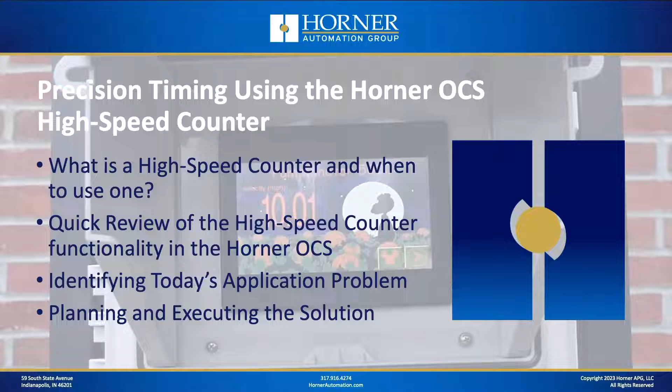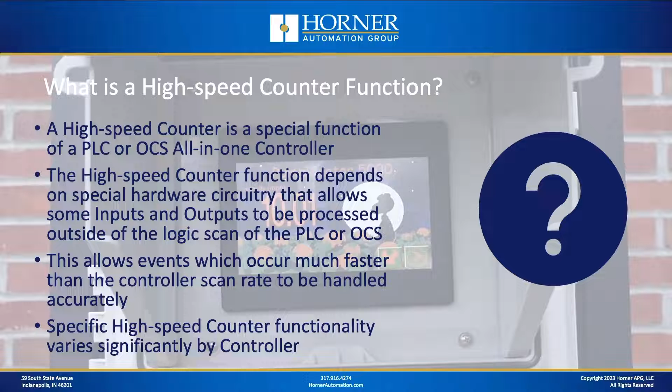So what is a high-speed counter function? Effectively, a high-speed counter is a special function of a PLC or an OCS all-in-one controller, and that function depends on special hardware circuitry built into the PLC or OCS that allows some of the inputs and outputs to be processed outside of the logic scan. This allows events which might occur much faster than the controller scan rate to be handled accurately. The specific high-speed counter functionality available is going to vary by controller, so you always need to pay attention to the capabilities of the particular controller you're using as you plan out your application.

So when would you use a high-speed counter function? There's a whole bunch of situations, and here's some examples. The most obvious one is when you're counting pulses that are on for a very short duration. Maybe you've got a pulse train of about 5K, 2K, 10K, maybe even just 1K, and obviously they're not on for very long. If you just wired that device to a regular PLC input, you're going to miss a lot of transitions. Similarly, if you're measuring a fairly high frequency accurately, you're going to need a high-speed counter. For today's program, we're timing an event where each millisecond is important, so we can't just use built-in PLC inputs and timers and counters in the logic program.

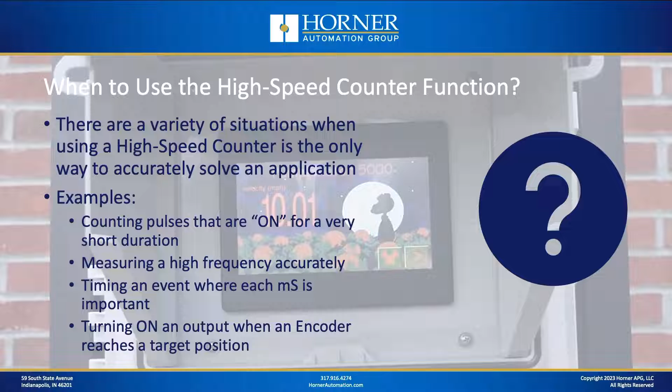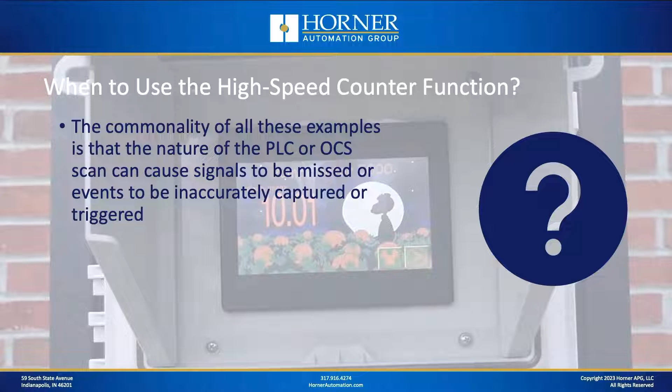Another good example is when you want to fire a digital output, a solid-state output, when an encoder reaches a specific target position. You'll probably need a high-speed counter function there. What all of these examples have in common is that if you just wire these signals strictly to your standard PLC inputs, you're going to miss signals and you're going to inaccurately time, capture or trigger events. That's the commonality between all those examples.

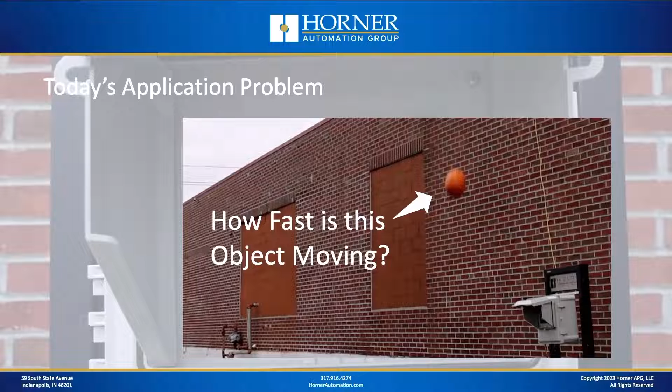Okay, so last week, our application problem was: how fast is this object moving? That object I've got highlighted there is a pumpkin that we dropped from the roof. So just before we get into the more serious stuff, I'll show you a couple replays of some of the drops that we did last week.

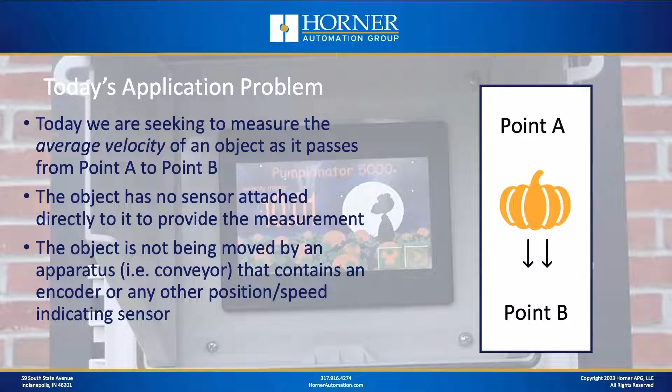Okay, so let's head back to our application problem. So effectively what we did last week is we needed to measure the average velocity of the pumpkin as it passed between point A and point B. And point A was the top of the roof and point B was the ground. Now, even though in some of our silliness we kind of pretended to put an accelerometer on the pumpkin at one point, for a bulk of the testing we did, there was no sensor attached directly to the pumpkin. We strictly depended on a photo eye at the top of the roof and another one on the ground. And the idea being that we would time very accurately how long it took for that pumpkin to get from point A to point B.

Now, let's say we were going to solve this application without using the high-speed counter function. How would we do that? Well, effectively, what we would do in that scenario is we would connect the two photo eyes, the one at the roof and the one at the ground, to standard PLC inputs. And then as soon as that first photo eye input turned on, we would start a 1 millisecond retentive timer, for instance. And then as soon as the second photo eye turned on, we would stop that timer. And as long as we had a retentive timer, that accumulator value would tell us down to the millisecond or so how long that took. So that seems like a reasonable approach to solving that problem.

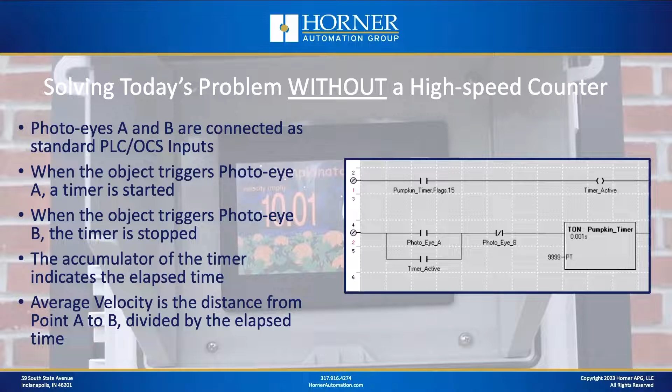And it would truly work if your distances between A and B are large and your object is moving very slowly. In that scenario, the scan rate of 5 or 10 milliseconds or whatever it happens to be for your application would be insignificant as compared to the measured times. However, as we were dropping these pumpkins from the roof, the distance between A and B wasn't very large. It was only about 4 meters, and the pumpkins were traveling pretty quickly. So strictly using the PLC method was not going to give us a whole lot of accuracy. Certainly not accurate enough for the Pumpkinator 5000, and so that's why we decided to use the high-speed counter function.

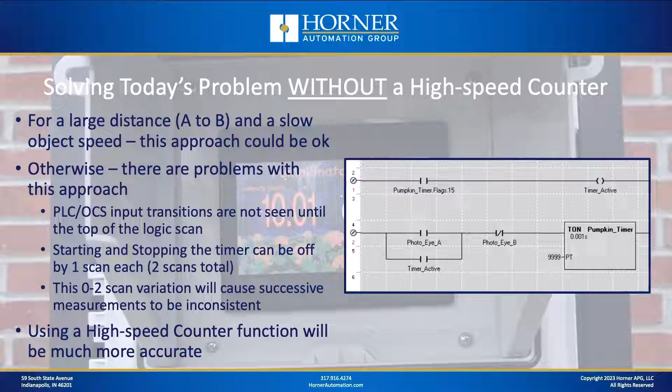Now, before we dive into the specifics of how we set up the high-speed counter and how you might do something similar in a future application, let's review a little bit the high-speed counter capabilities between the different OCS product lines. And this is true even if you're using a PLC. You always need to understand specifically what the high-speed counter capabilities are with your hardware. If you're using some of our lower end products, still very capable, like the XLEE and XLTE and the Micro OCS series, you'll find you have 4 high-speed counters available, and you can do all kinds of functions. You can do totalizing, which is counting. You can do frequency measurement, pulse measurement, and you even can connect an encoder and use quadrature mode. Okay, so that's a pretty good capability.

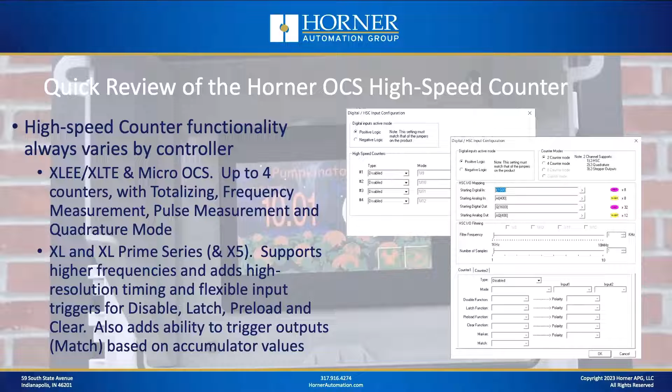But if you're using our higher end products, like the XL series from the XL4 on up, including the X5 or the Prime series and the future Canvas series, you'll see there's a bunch of additional capability. So in addition to supporting higher frequencies, we also add high resolution timing and flexible real-world input triggers for disable, latch, preload, and clear. You'll also be able to fire real-world outputs based on high-speed counter accumulator values. That's another key capability. So as you can see, the XL series, XL Prime series, those higher end products have a little bit more capability. And specifically in our application, because today's problem is one of precision timing, we're going to take advantage of the high-speed timing capability of the XL series and above high-speed counter. So we decided for the Pumpkinator 5000 that we would use the EXLW.

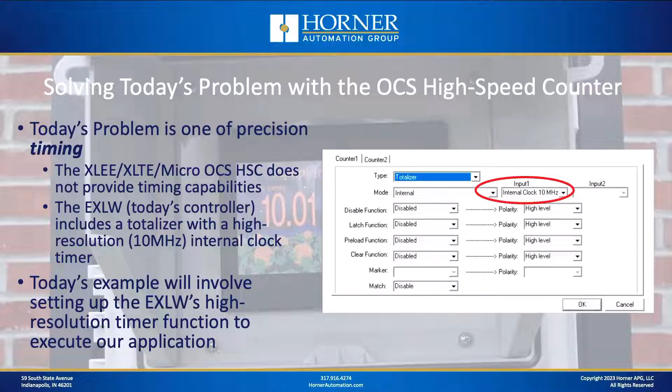It was a controller we had sitting around, and it has the enhanced high-speed counting capabilities. Okay, so how are we going to set this up in the OCS? Now, I'll go through all the detailed configuration in a bit, but let's go ahead and show you through a couple of slides first.

As I just mentioned, we're going to take advantage of a special mode of the totalizer of the high-speed counter where we can effectively count 10 megahertz pulses that are generated by an internal clock. That gives us the ability to turn our high-speed counter into a high-speed timer and use those capabilities. Now, what we're also going to do is take our photo eyes, A and B, and wire them in not just to any regular old input, we're going to wire them into one of the 4 high-speed inputs.

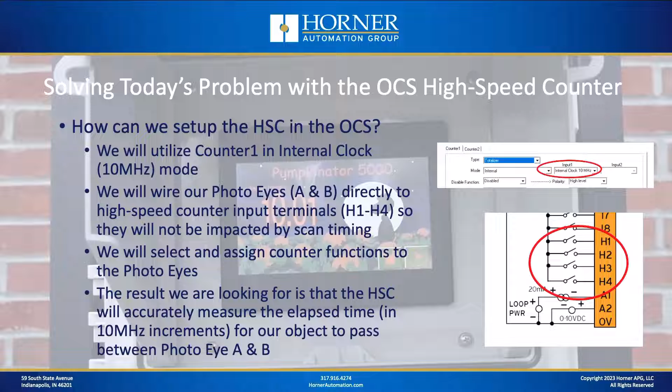In the XL series and XL Prime series and the future Canvas series, those are labeled as H1 through H4 on the terminal strip. And then from a memory map standpoint, those are I9 through I12. So those are the high-speed inputs that are physically connected internally in the OCS hardware to the high-speed counter circuitry. So the result we're looking for is that our high-speed counter is going to be sitting there counting up in 10 megahertz increments, and we're going to somehow use those 2 photo eyes to capture and measure the elapsed time.

Okay, so now there are 4 high-speed functions that are kind of in our toolbox for any high-speed counter application. And these are disable, latch, preload, and clear. And for every high-speed counter application, you can decide, do you want these functions to be performed by an external real-world input connected to one of the high-speed inputs? Do you want it to be an internal function triggered by a variable that's mapped to a Horner internal memory point? Or do you just want to disable that feature for that application because it's not really needed?

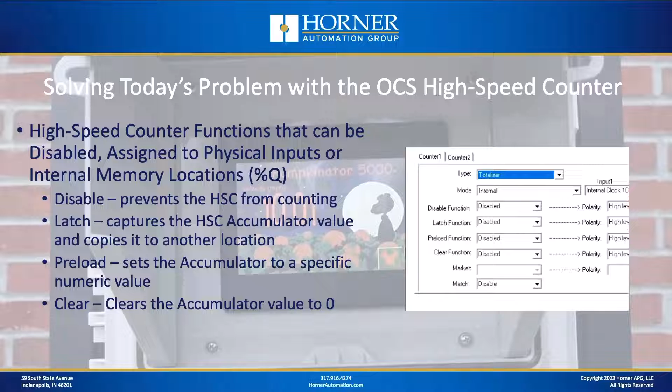Now, the 4 different functions do as follows. You have the disable function, which will disable the high-speed counter from counting. You have the latch function, which will instantaneously take the current value of the accumulator and copy it away to a different location where it can be accessed later. You've got the preload, which you can use to effectively set the accumulator to a specific value, and it's typically a non-zero value. So maybe your machine is at position 10,000 and you want to load the 10,000 into your accumulator and then take off from there, for instance. And then the clear function is pretty self-explanatory. When that's active, the accumulator is set to a value of 0.

Okay, so let's set about solving this problem by first thinking about it like we were doing it using just the standard timers that were built into the PLC, and we were wiring everything to a standard PLC input. So could we make the high-speed counter work such that the counter would start timing, counting 10 megahertz pulses when the first photo eye is triggered, and stop timing or counting when the second photo eye is triggered? Well, to do that, I think we would have to utilize the disable function very creatively. We would have to connect the disable function to a real-world input, and somehow make the disable function turn off whenever the leading edge of that first photo eye is triggered.

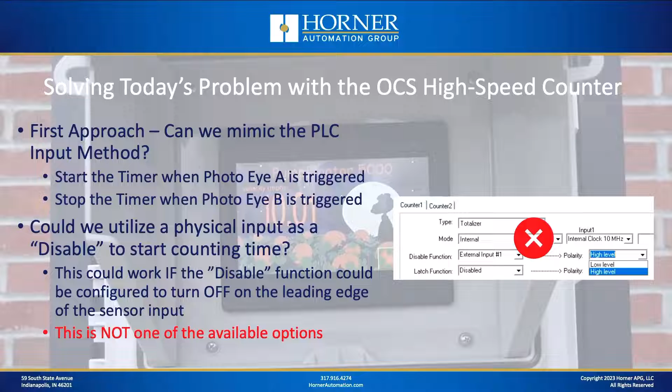And if we go into the configuration under the disable function, yes, we can connect it to an external input, but the only choices we have are either to turn on the disable function when the physical input is high, or turn off the disable function when the physical input is off. So that's really not the flexibility we would need to configure it this way. So we're going to abandon this first thought of making the high-speed counter work exactly like it was just a regular PLC type timer.

Okay, instead, what we're going to do is as follows. We're going to utilize disable, but we're going to use it as an internal function. So we're not going to use an external real-world input to enable and disable, or to turn on the disable function for our high-speed counter. We're going to do that internally in our program. And the reason we're going to do that is because enabling and disabling isn't necessarily critical from a timing standpoint.

Because what we're going to do in this scenario is when we turn off the disable on our counter, allowing it to start counting, we're going to make that non-critical from a timing standpoint. And instead of using that to kick off the start of the elapsed time calculation, if you will, while the counter is busy counting, we're going to use the clear function connected to the first photo eye.

So the high-speed counter will be not disabled. It'll be sitting there counting up in 10 megahertz increments. And then when that clear input turns on from the first photo eye, it's instantaneously going to go to 0, but then continue right on. And then therefore it'll be counting up from 0 until it hits that second photo eye, which we're going to assign to the latch function, and then we'll get the result we want.

The elapsed time in 10 megahertz increments will be contained in the latch register. So that's where we'll actually see the result of our experiment, if you will, or the result of our calculation. Now, this can only work if both the clear and the latch functions can be active on the leading edge of those switches, because that's what we want to happen.

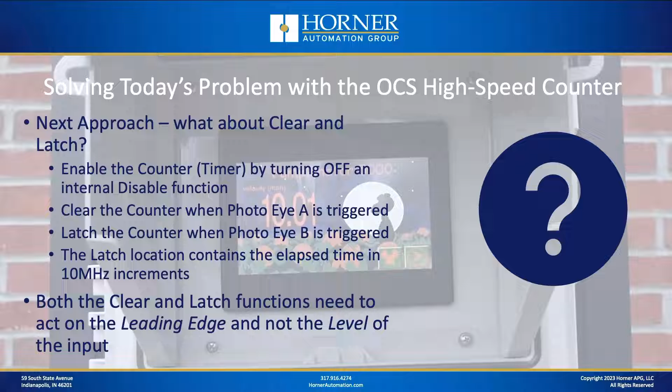And as we go into the high-speed counter configuration block, and I show you a screenshot of that, you can see we can configure it exactly as I have just described. So we can assign disable to an internal bit, which we can then map to a variable. We can assign the clear to our first external high-speed input. We can assign the latch to our second high-speed input, and then we can assign both those high-speed inputs to be active on the rising edge of that signal. So that's what we're looking to do there.

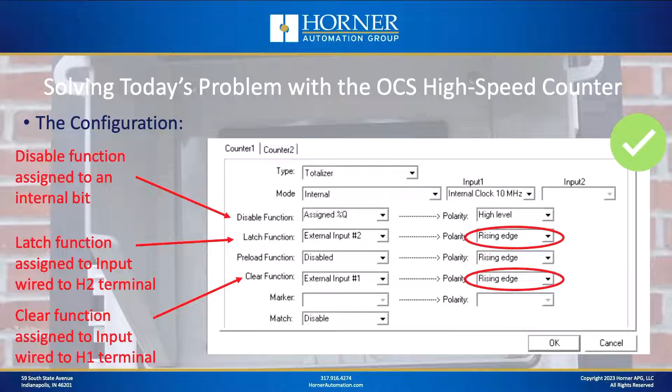Okay, now when we get to actually getting into our program after we've done the configuration and we need to start creating variables and using those in our program, the first thing we're going to have to do is go to the user's manual of the specific controller that we're using and find the high-speed counter memory map. And I've just got a snippet of it here for the EXLW counter number 1, showing the memory map for the accumulator, for the latch value, and then for the latch, preload, clear, and disable functions that are mapped to %Qs, whereas the accumulator and latch values are mapped to %AI registers.

Now, in our application, there's some key variables we're going to need to utilize. So we definitely care about the latch value because that is where our resultant elapsed time is going to be in 10 megahertz increments. So we're going to need to create a variable that we map to AI403. That'll be our latch value as a double integer. And then because in my case, I've chosen to disable and enable the counter to start and stop it from logic, I'm also going to need to create a high-speed counter disable variable and map that one to Q1604.

Now, I'm not going to assign variables for the latch, preload, and clear for the Q bits, because certainly the latch and the clear are going to be handled from the real world side of things. Now, one last note here, and that is this. I still want to be able to see the status of the top and the bottom photo eyes, even though they're directly wired into the high-speed counter circuitry. I still want to be able to tell if those are on or off, because I might need that elsewhere in my program.

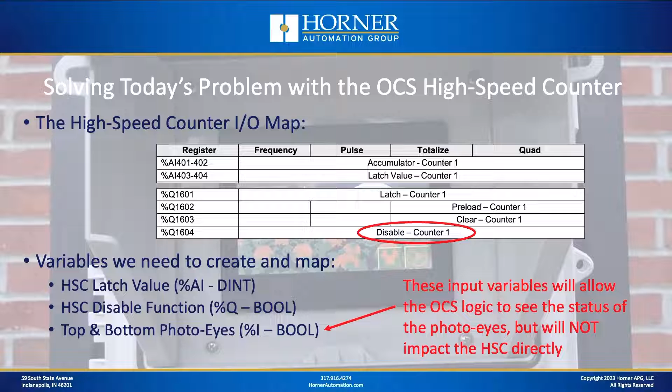Okay, and then once I have the elapsed time in 10 megahertz increments, then it's just more or less simple math, because remember, the distance between the two photo eyes is a constant, a certain number of inches. And then if I want to take my 10 megahertz increments from my latch value and convert that to milliseconds, which is a convenient unit for applications in the automation industry, I just need to divide that value by 10,000. That'll give me milliseconds. If I want velocity in inches per second, I take the fixed distance between A and B in inches, divide it by the number of milliseconds, and then multiply by 1,000 to get my milliseconds over to seconds.

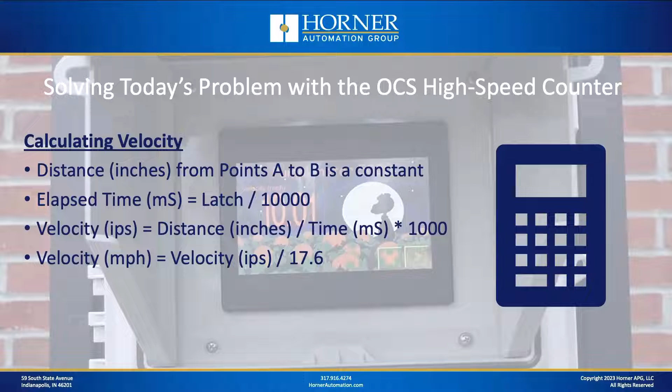And then to convert to miles per hour, I just divide inches per second by 17.6. And yes, I just Googled that. I could have figured it out, but I just decided to Google it instead.

Okay, so let's go ahead and take a look at how we've set things up in Cscape and how things look here on the bench for our Pumpkinator 5000. All right, so let's take a look at the bench first. Okay, and here we go. We've got our EXLW with our Pumpkinator 5000 program, and I'm just using my handy dandy IO simulator wired up to the first two switches.

So I have switch number 1 connected into the first high-speed input. Remember, that's acting as the clear. And I have toggle switch number 2 connected to the latch, high-speed input number 2 on my Pumpkinator, so that I can, again, perform the latch function as my pumpkin falls from point A to point B. So that's what things look like on the bench.

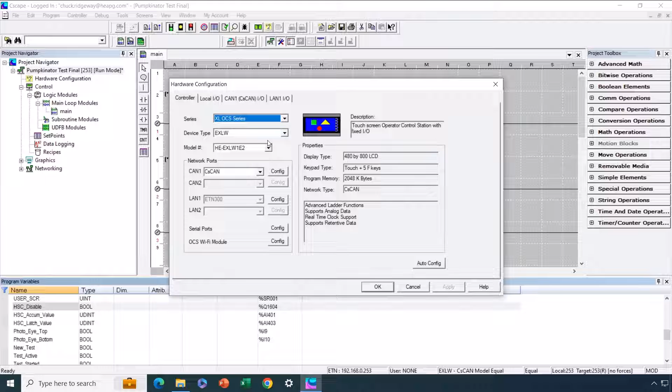All right, let's go back to Cscape now, and let's take a look at our program. Now, with the high-speed counter, you always start with your I/O configuration. So let's take a look at that I/O configuration. So here's my EXLW. I need to go to the local I/O tab. I select the config button on the I/O area here. I go to module setup, and I go to the digital in/high-speed counter button. And this is all the setup that's available for my high-speed counter.

Now with the XL series, you've got 2 counter mode and 4 counter mode available. And I believe with XL Prime, the default is just 4 counter mode. I'm not 100% sure on that, but I'm pretty sure that's the case. We can configure whether our inputs are positive logic or negative logic, and that impacts all the inputs, not just the high-speed inputs. We have a default memory map for all the different high-speed counter functions. Now, in almost every case, you're going to leave these exactly as they are. That way, all the tables in the user's manual will match these references exactly. So it keeps things nice and simple.

Now, you also have some filtering capabilities that I'm not taking advantage of here. If I was installing this in a real machine, I probably would do a little bit of filtering to prevent signal bouncing on my photo eyes. That would be something I would probably do, but I didn't do that in this case. And then down here at the bottom, that's the screenshot I showed you earlier. That's the configuration I'm specifically using for this application.

So I am using a totalizer or counting mode instead of one of the other modes that you can see here. And then I'm using a special mode, which is counting internal 10 megahertz clock pulses. Now, there's also a 1 megahertz mode, and that would have been ample for this application, but I selected the 10 megahertz instead. And then down here is where we decide where we want our disable, latch, preload, and clear functions to come from.

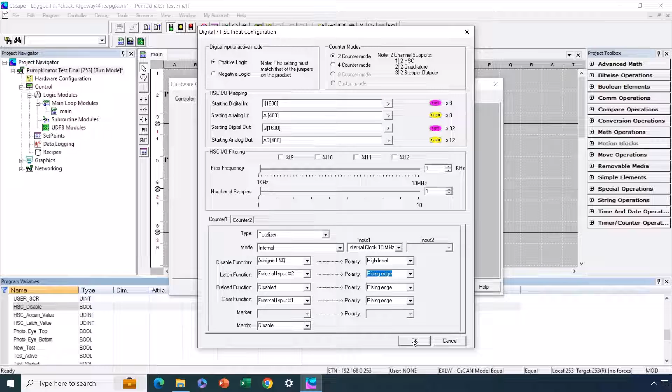Now let's take a look at how we've created our variables here. So let's go down to our program variable table. And the first thing you're going to see is the high-speed counter disable function, which we chose to do as an internal variable as opposed to an external real-world physical input. So we've created a Boolean variable and we've mapped that to Q1604. Why Q1604? Well, that's the default memory address for the internal disable when you look at the EXLW high-speed counter chapter of the user's manual. So again, you're going to need to reference that user's manual.

I went ahead and created a variable of unsigned double integer type for the accumulator. And again, from that table in the back of the manual, that's at AI 401. And then I also created the key latch variable. That's where our elapsed time value is going to reside. And that's in AI 403.

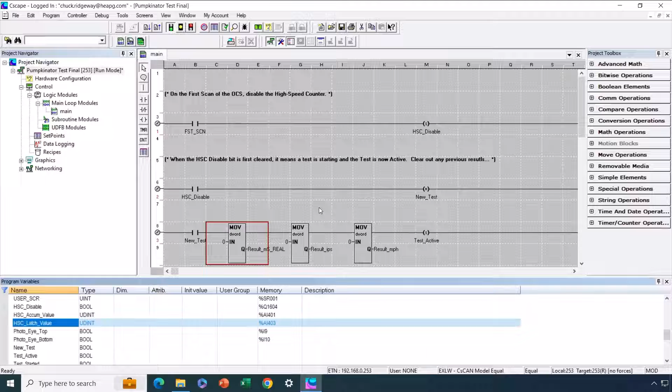Now, for my photo eyes top and bottom, remember, those signals are physically wired into high-speed counter inputs H1 and H2, but I'm still interested in knowing when they turn on and off. So I'm going to assign %I9 and %I10 here so that I can follow along and see when those switches turn on and off, because I might want to use those elsewhere in my program. Okay, so that's what my variables look like. All right, now let's go back to the bench. Let's look at the Pumpkinator 5000 in action, see how that all works at runtime, and then we'll come back and take a look at the logic.

Okay, so let me switch over to my bench view. All right, here we go. So this is my main screen. So this first button represents the first photo eye, and this is the second photo eye, number 2. So I'm going to first need to enable the test, which effectively turns off the disable to the high-speed counter, and I'm going to do that from the screen.

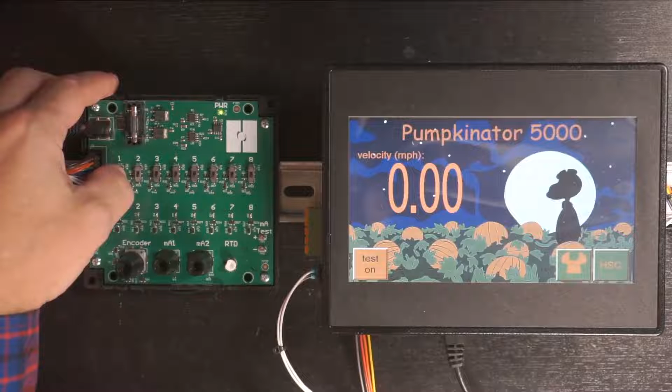Okay, so now my test has started. Now my pumpkin hasn't reached point A yet. Okay, that will be found whenever I flip this first switch. Okay, and then it'll reach point B when I flip this second switch. And then because it took quite a while for that to happen, you can see my pumpkin was only going at 2.75 miles per hour. Now, if this pumpkin was dropping from the sky, that wouldn't be very realistic, but maybe if it was going sideways or something, that might make sense.

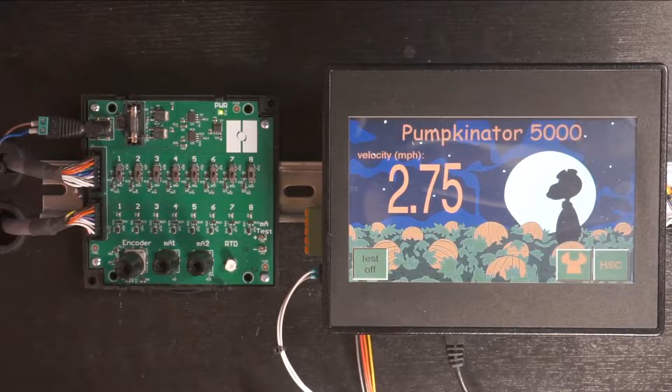Okay, so that is kind of what it looks like from the main screen of the Pumpkinator, but let's go under the hood a little bit and see how this thing works with a little more detail. Okay, so this is the screen where I enter in what is the distance between points A and B, which in my case is the drop height that we're talking about here, okay?

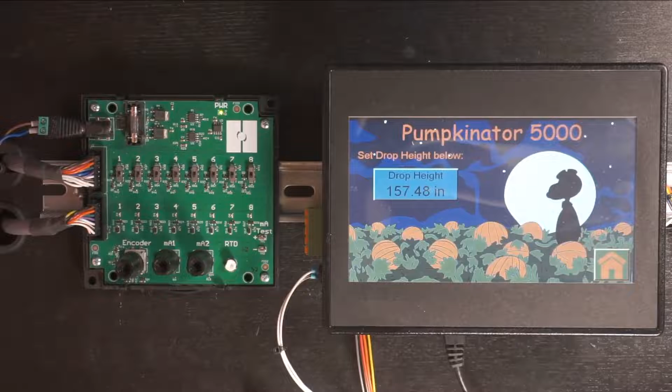And then on this screen, this is where we get to follow along and take a look at the values in the accumulator and the latch value, as well as the results of our calculations. And what you're seeing here on the screen is the results from the previous trial. So let's go ahead and run a trial from this screen. I'm going to go ahead and start by enabling the high-speed counter.

You can see that the accumulator value just took off from wherever it was. It didn't clear first, it just took off from wherever it was. And then the results at the bottom are zeroed out, but that was caused by logic. Okay, so we're waiting for that first photo eye to turn on. And then once that happens, we'll be waiting for the second photo eye. So let's go ahead and, I guess, release our pumpkin. Okay, so here's point A and here's point B.

Okay, so as you can see, our accumulator kept going until the high-speed counter was disabled automatically by ladder. But the latch value there is the actual value in 10 megahertz increments when that second photo eye was first tripped. Now, one thing you'll notice is that the accumulator value is different than the latch value. That's because it kept on going.

So one way you can look at this is you can see that our trial took a little over 1,000 milliseconds. At the bottom there in the lower left-hand corner, you can see 1,060 milliseconds. But if we depended on freezing our accumulator through a real-world logic input, you could see we would not have accurately gotten that information. It would have been off by quite a few counts there, as you can see.

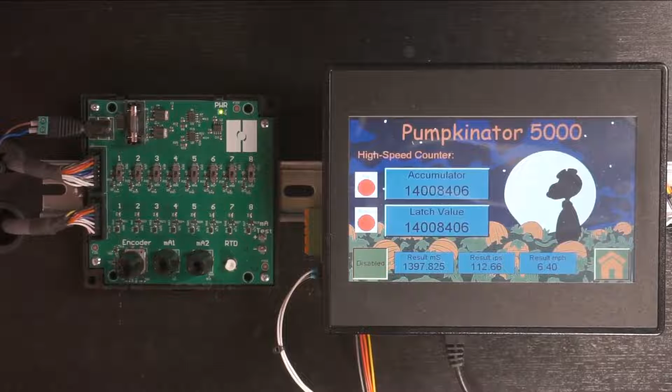Okay, let's head back to Cscape and take a look at how I implemented the logic for the high-speed counter. Okay, so whereas for the high-speed counter configuration there's probably a little less room for variation from what I did, depending on the way you want your application to work specifically, there's probably quite a bit of room for you to program the application a little differently than I did. So the way I've programmed the application is this.

On the first scan of the controller, I went ahead and turned on the high-speed counter disable function. Remember, we're doing that from logic. So the high-speed counter on the first scan is just sitting there frozen at its previous value. It's not ready for a trial or anything.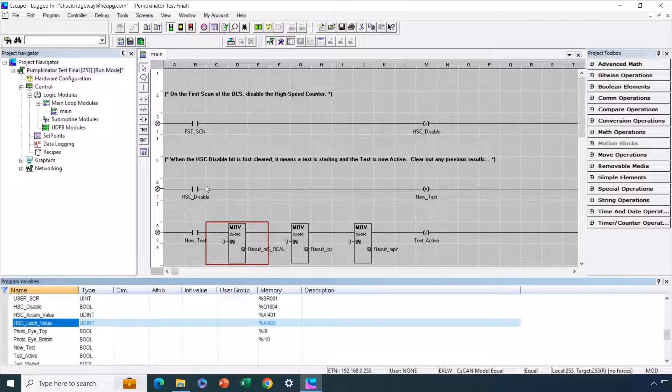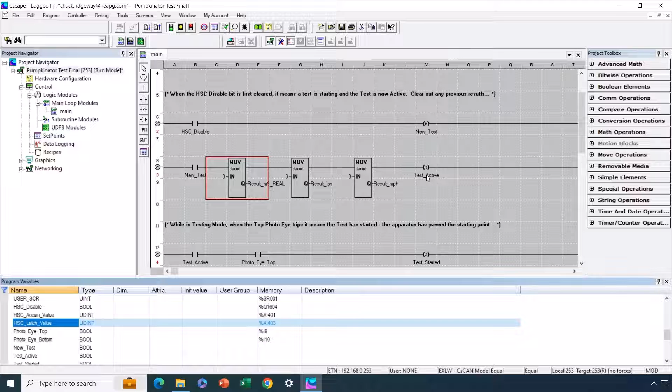Now, my next rung says this. When this particular high-speed counter disable bit, and I'm controlling that from the screen, remember I've got that push button on the screen, when that bit goes from on to off, I've got a negative transition one shot that's going to turn on to indicate I've got a new test started. And when I start that new test, I'm clearing out my previous calculations and setting a flag. This is just something I've chosen in my program. I'm setting a flag that says, hey, our test is now active. We're ready for that pumpkin to drop.

Okay, and then while our test is active, as soon as that first photo eye trips, again, this has no impact on the high-speed counter, it's just we're following along in the program. As soon as this first photo eye trips, we set another internal flag that says, hey, our test is actually started. Our pumpkin is between point A and point B. And then once that's happened, and now the second photo eye hits, we're in another state that says, well, our test is complete, and we should have a new result in our latch value.

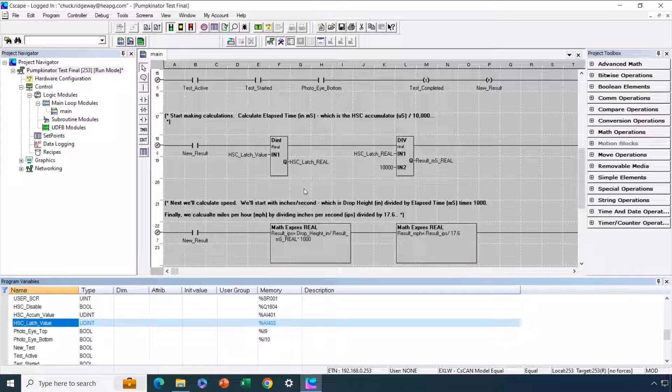All right, so when our new result one shot hits, we're going to do our simple calculation to take our latch value, convert it to a real value. Remember, it's a double integer by default. We're going to divide that by 10,000 to get a millisecond value for our elapsed time. And then we're going to take elapsed time and do our simple calculations for inches per second and miles per hour because the distance between A and B is fixed. And then once we're done with our calculations, we'll clear all those flags and disable the high-speed counter again, and we're ready for the next trial.

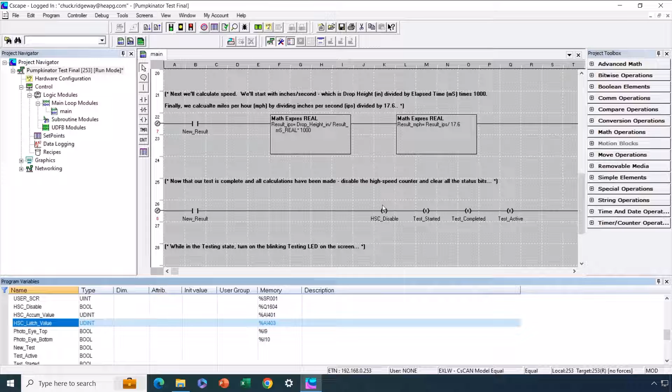Okay, so that's how I chose to program the application. You could have made other choices, but the high-speed counter setup, the one I chose, is probably the one that you would need to use as well. Okay, let's go take a look. And I believe, yep, that's true. That's the end of what I wanted to cover with you today. So hopefully you found this informative and you now realize that not only can you use the high-speed counter to count with, you can also use it for precision timing applications.